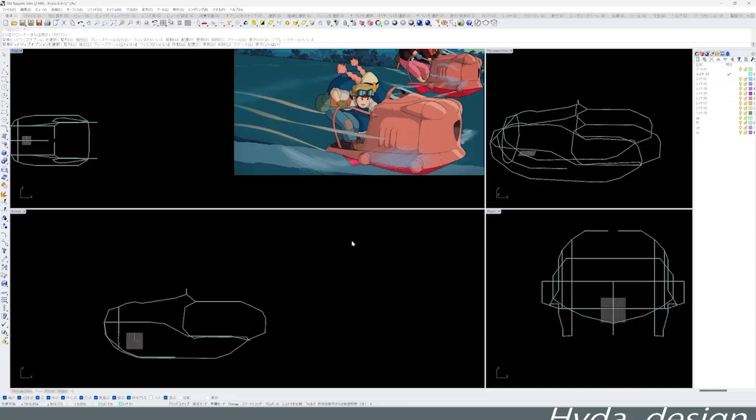Today's theme is a vehicle called Flapter that appeared in Castle in the Sky, a movie by Studio Ghibli. I would like to try what it would be like if I made it a modern style.

I would like to show the situation in time lapse.

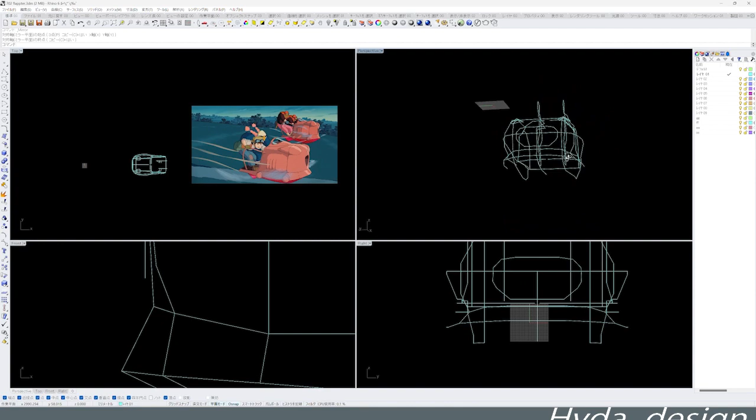This vehicle is a style to operate while standing, meaning slightly crouching. It seems to have a handle lever, but it seems that the mainstream method is to operate it by shifting your weight. It seems to be an operation method in which you have to hold the pipe at all times.

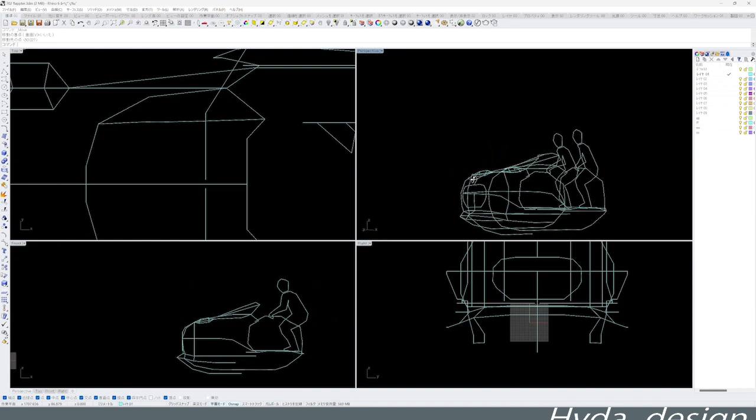In the initial setting of the original design of this machine, there is a sketch with a hand like the front leg of a cicada larva.

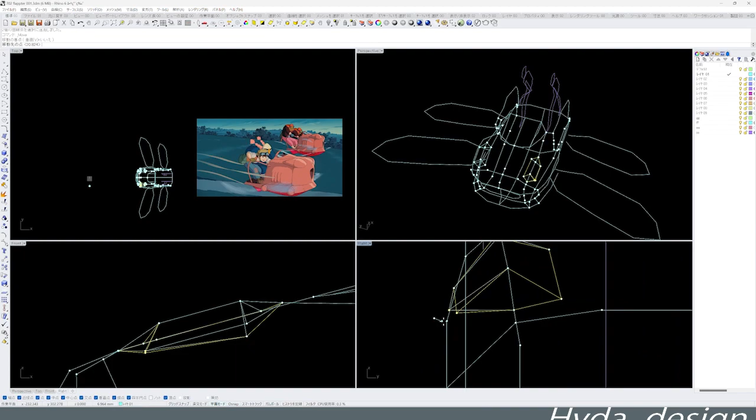You can hang the front legs on the wall to keep the aircraft in place. It seemed that the usual way of parking was to hang it on the wall instead of parking it on the ground.

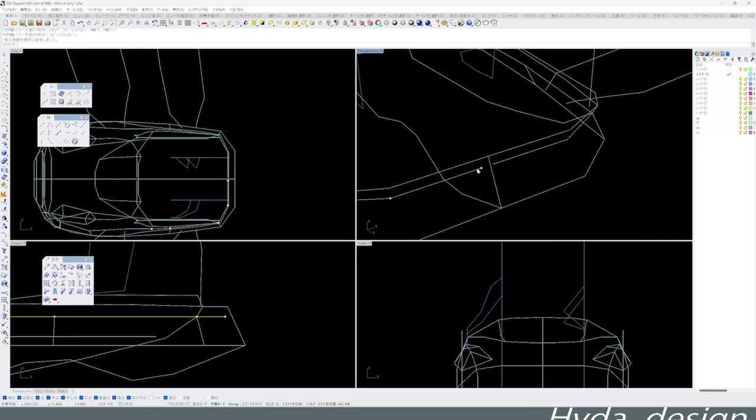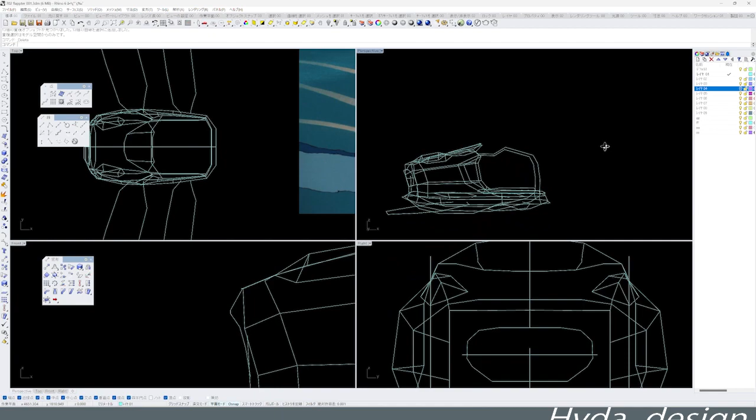The bottom of the aircraft looks like a ship, so I thought it was a type of flying boat. That's why this machine may not be able to land on land.

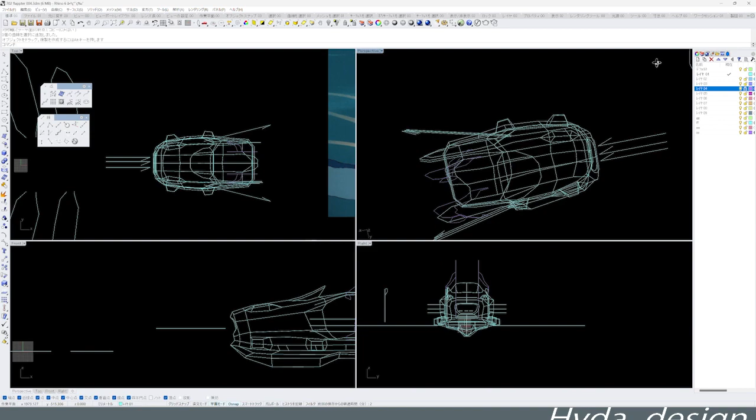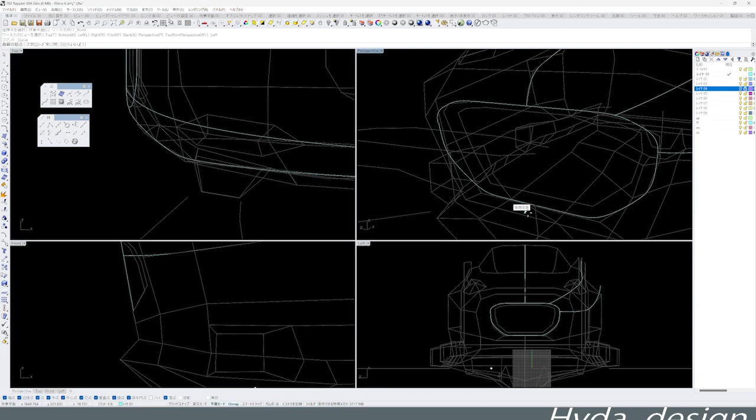There is a scene where two people steer this ship. There are accelerator and brake pedals. When riding with two people, it seems necessary to decide who is in charge of which pedal.

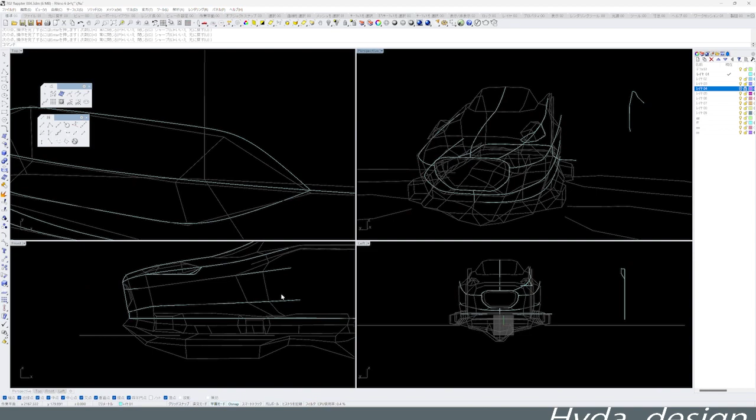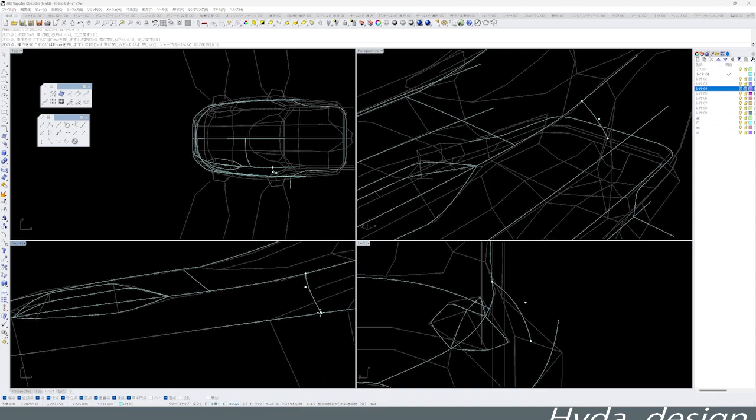This is because there is a high possibility that your feet will not reach the pedals when riding with two people, since it's necessary to operate by synchronizing the two people.

There may be a hidden setting that the pairing that appears in the movie is between people who get along well.

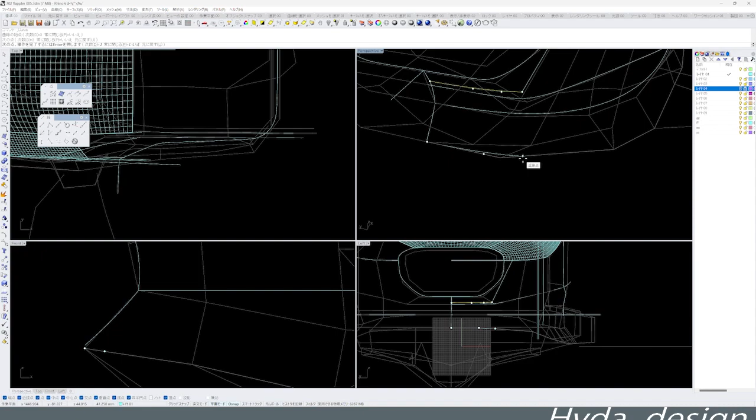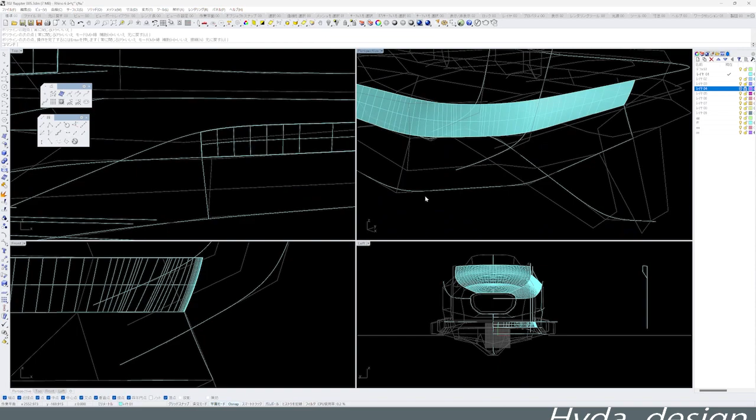The next thing is written in the setting materials, but this wing is said to be moved by artificial muscles. Since the artificial muscles work by electrical stimulation, it is expected that this aircraft contains an electric generator.

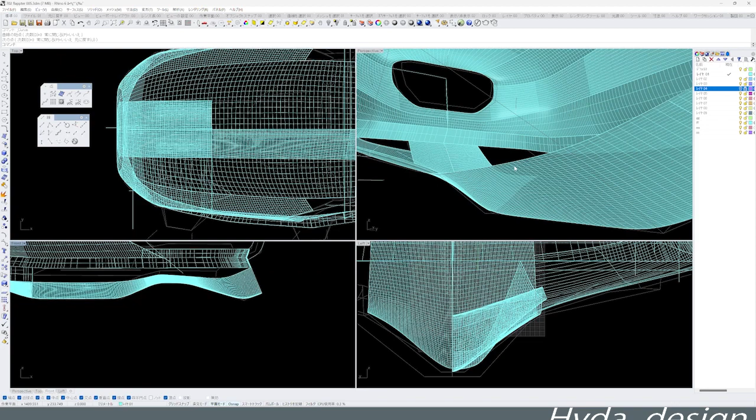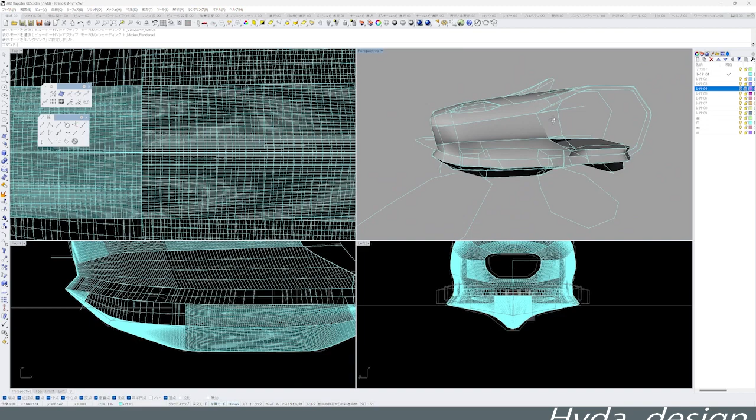The characteristic shape of this machine has projections on both sides toward the front. I didn't quite understand the purpose of these two protrusions. They didn't seem to be lights, headlights.

These resemble the compound eyes of cicada larvae, and may have been added as a feature to make it look that way.

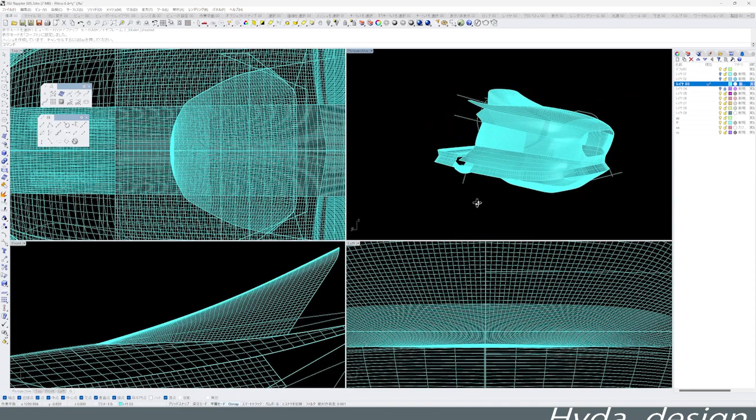In any case, these two protrusions are important elements that show the characteristic of this plane, so I decided to follow them.

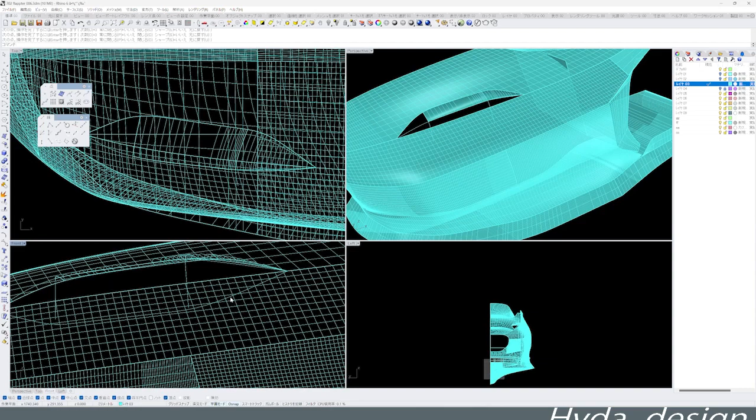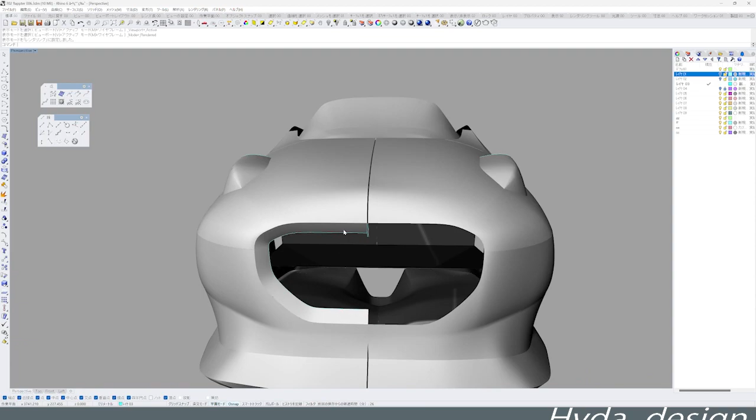Now I'm making the air intake. It seemed to be designed so that air flows from the air supply port at the tip to the exhaust ports on both sides.

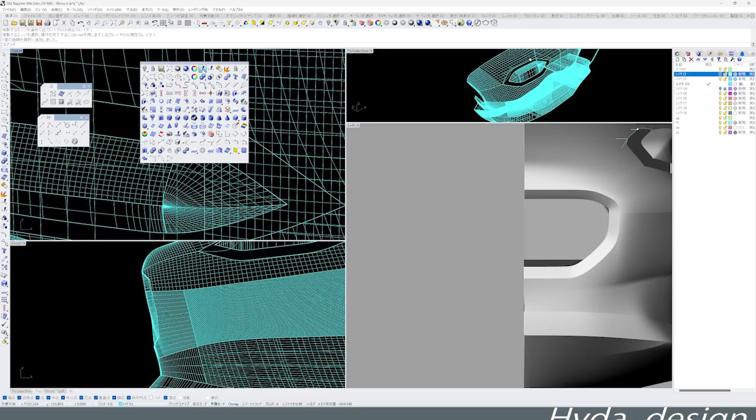The original design also has shark gill-like slits on both sides.

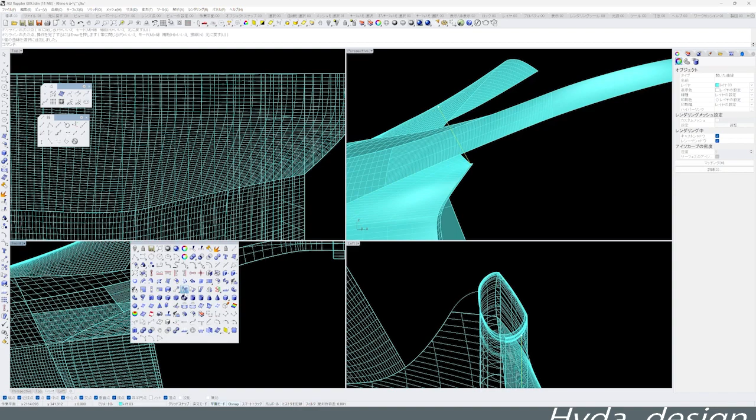I'm making the handle part now. The original appears to be made out of bent metal pipes.

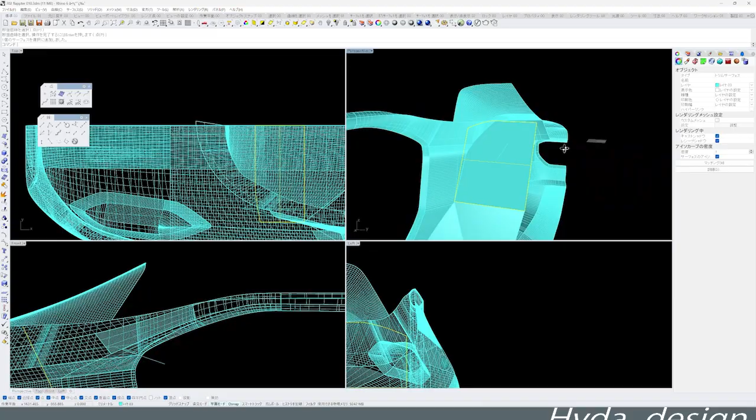This is supposed to be a slightly luxurious material, composite plastic of carbon material.

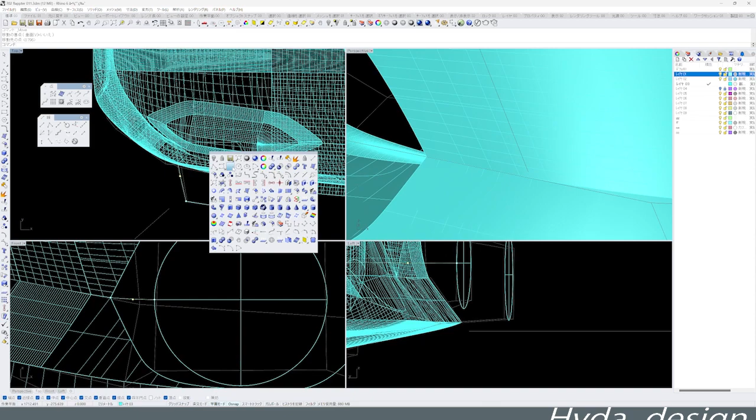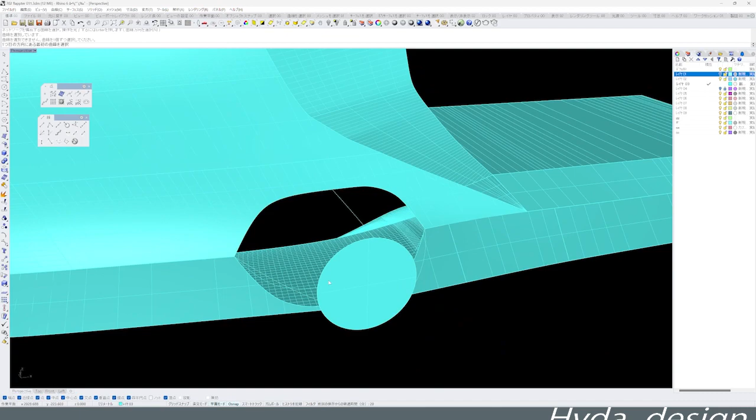I had to think a little about the position of the base of this wing. It was worried that if the roots of these wings were far from the body, the power of the muscle would not be transmitted well.

On the other hand, if the base of the wings is too close to the body, there is a concern that the wings cannot be folded.

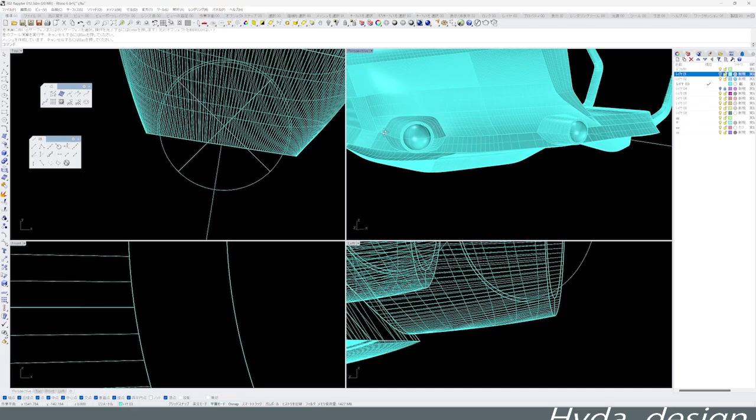In the original, there is a scene where the wings are folded and stored in the mothership. The joint at the base of the wing is positioned so that both can be achieved.

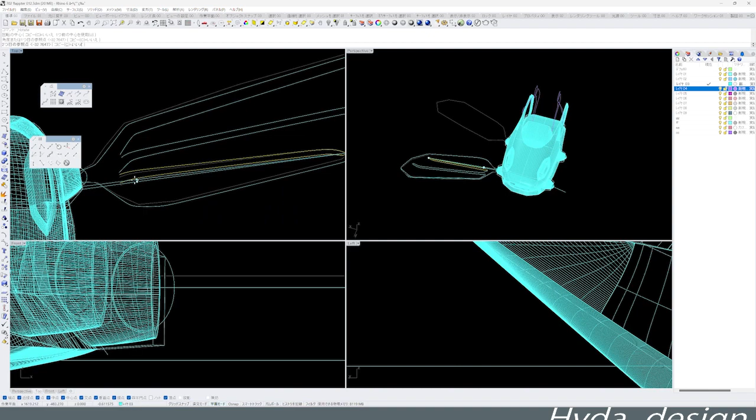I'm modeling wings now. The original wings do not have vein-like lines like this. It was very flat, smooth, beautiful, and transparent.

In this design, I want to give it an insect-like element, so I added a line like this.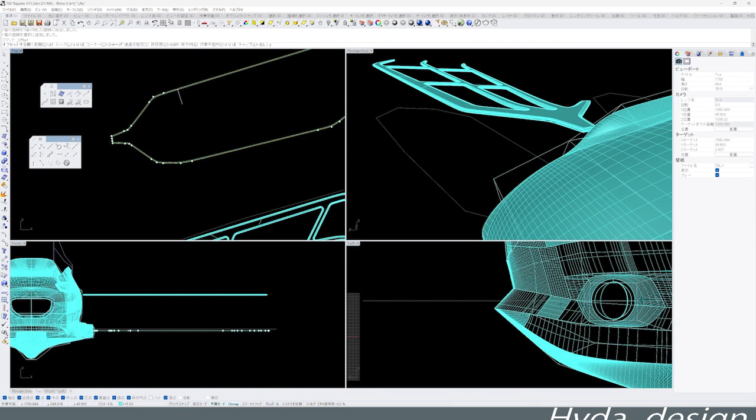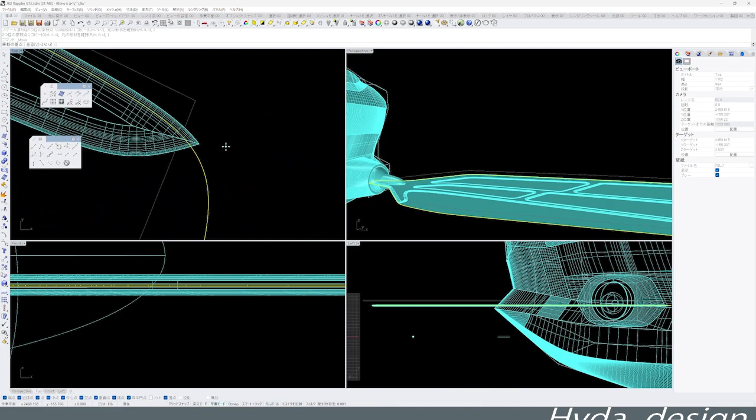It is assumed that the bones are added only where strength is required, and the other parts are made as thin as possible to reduce weight.

It assumes a method of production using modern 3D printing technology.

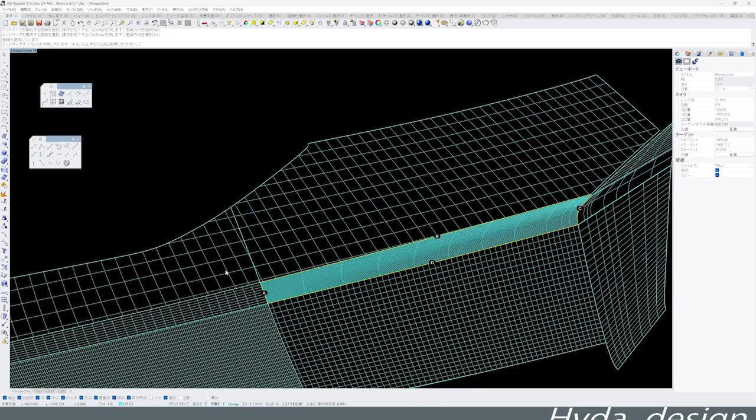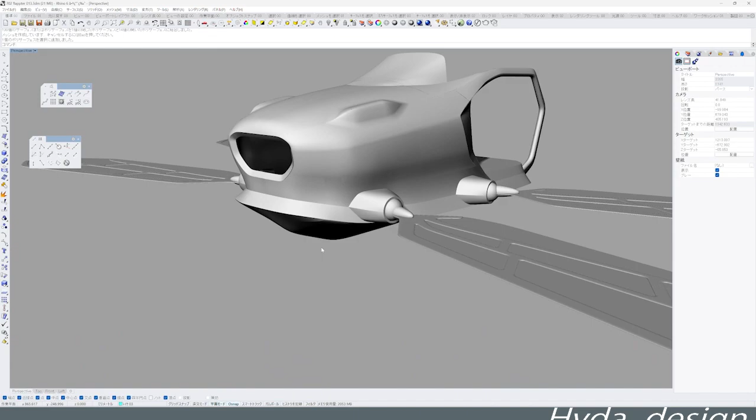Such a symmetrical model is routinely made in half. However, when mirror copy is performed, there may be a step at that joint. In that case, I think the best way is to cut each other a little bit and connect the new surfaces smoothly.

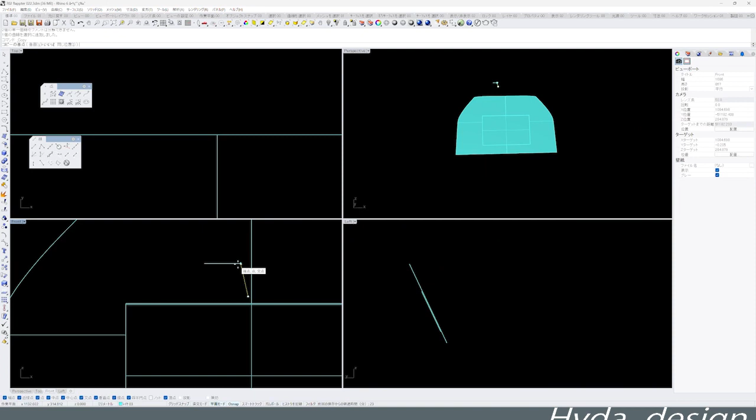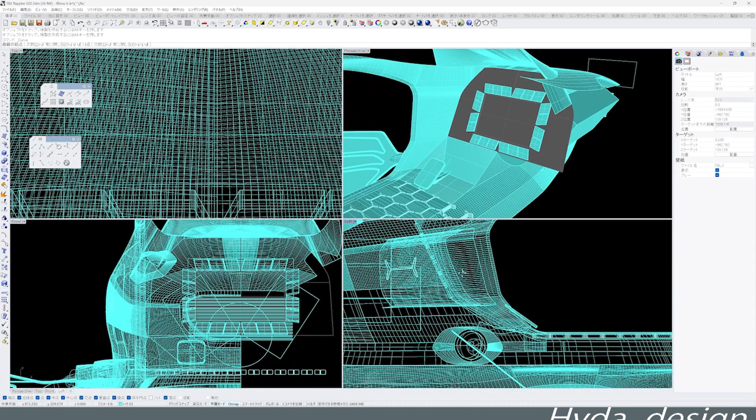Let's move on to the interface part. The original machine has analog meters and some toggle switches. I think it's a device that was chosen to represent the atmosphere of the era of the work. This time I'm thinking of a slightly more advanced era, 50 to 100 years from that, so I'm trying to use new devices.

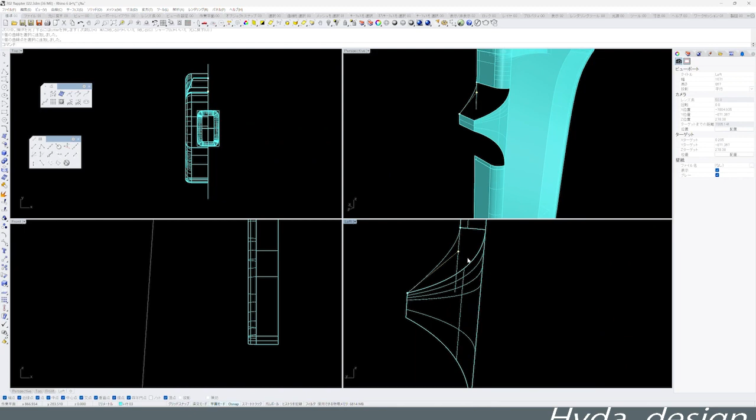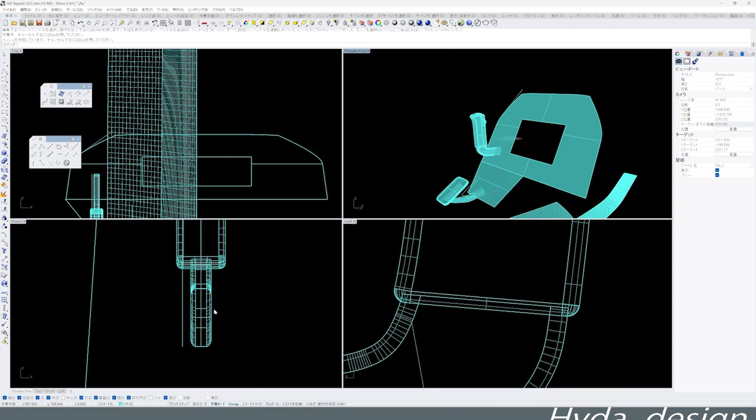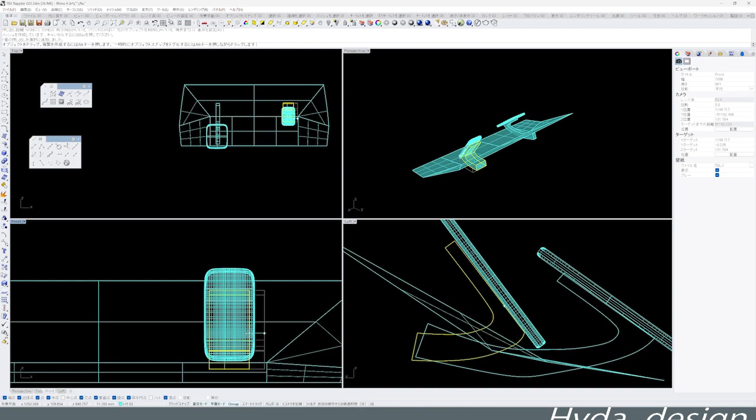The interface is a combination of a liquid crystal panel and buttons. I think these are the formats used in fighter cockpits, as you know. I think the good thing about this format is that you can change the software when you update the version. Another advantage is that you can reduce the number of buttons because you can change the functions of the buttons for each screen.

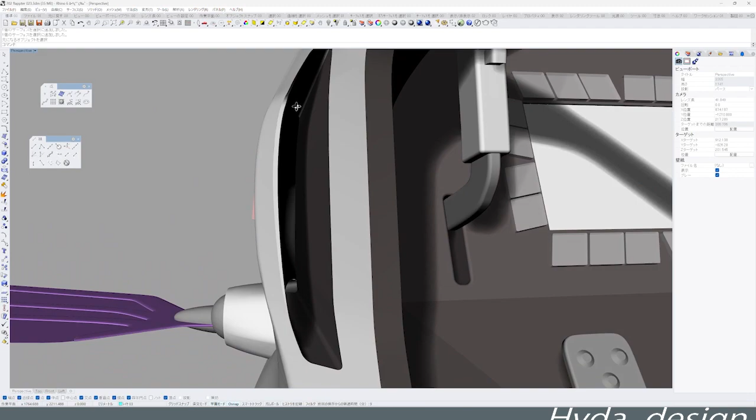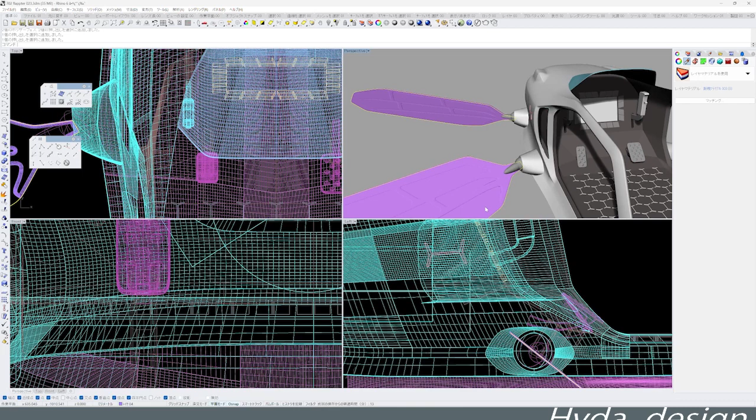There are spike-like protrusions on the floor of the cockpit, for better grip on the bottom of the shoes when shifting weight. Hexagonal ribs for pressure in multiple directions.

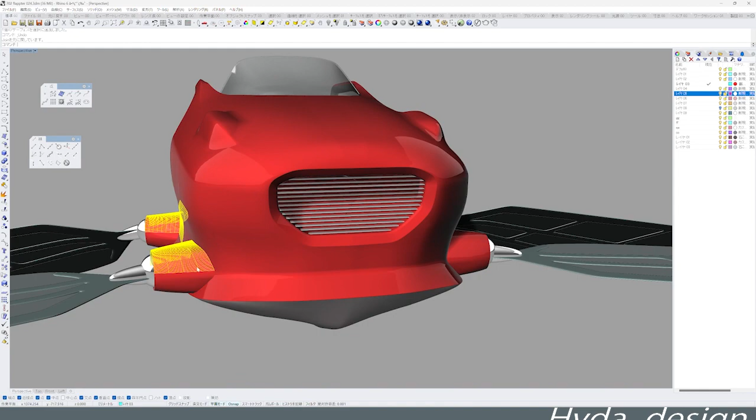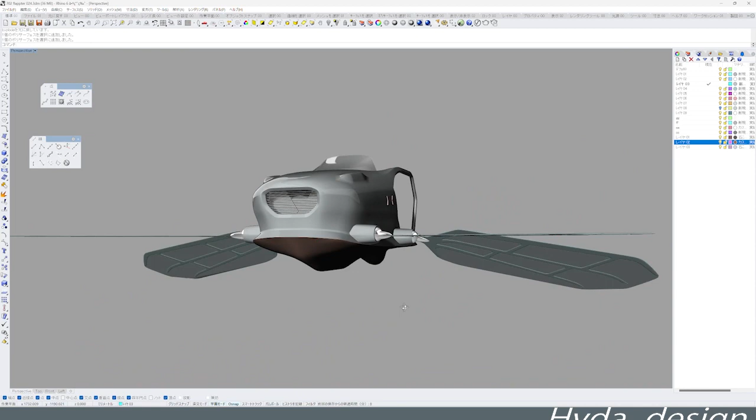As for the color, I thought that various colors could be considered. I've had the impression that it looks a little like a sports car, so maybe the gentle colors did not fit. I felt that the calm color was a mismatch, so I used a bright red for this main render.

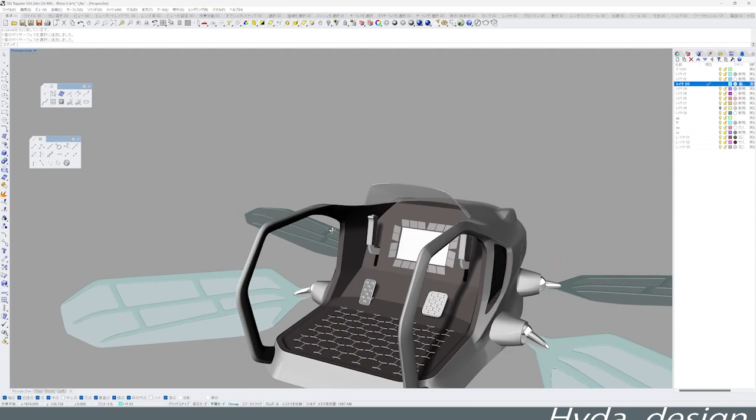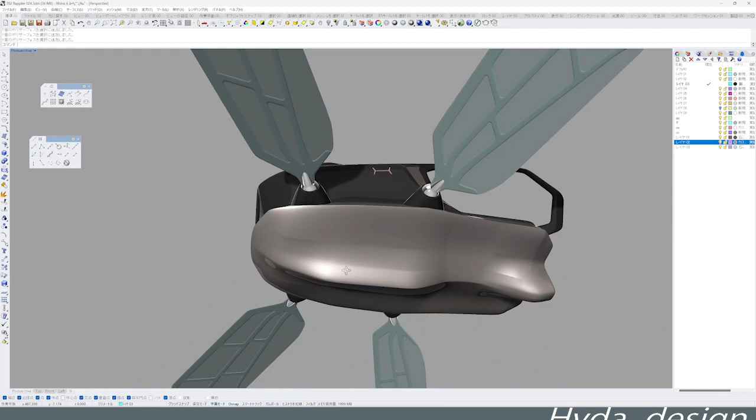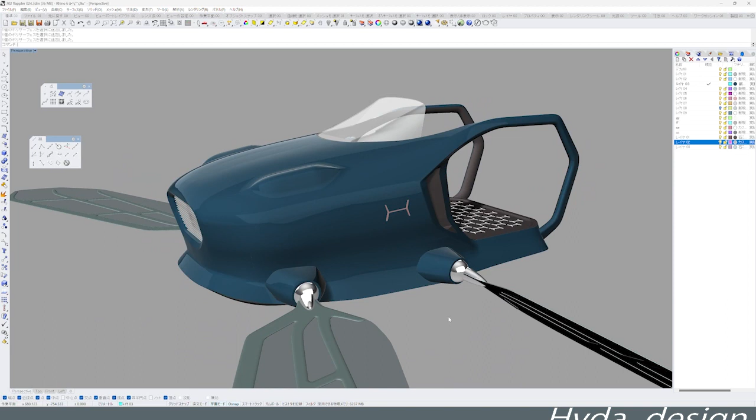Black is cool too. This color is nice too. Yellow may not suit this. I personally like gray.

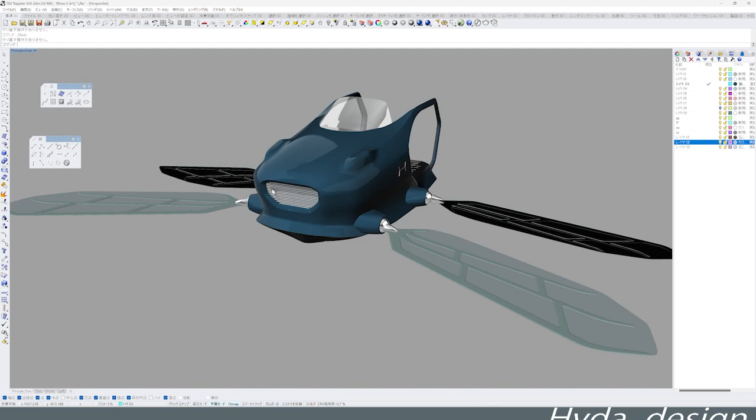Red is the main color this time. White is also good. The moss green is similar to the mobile armor of the Zeon army of Gundam.

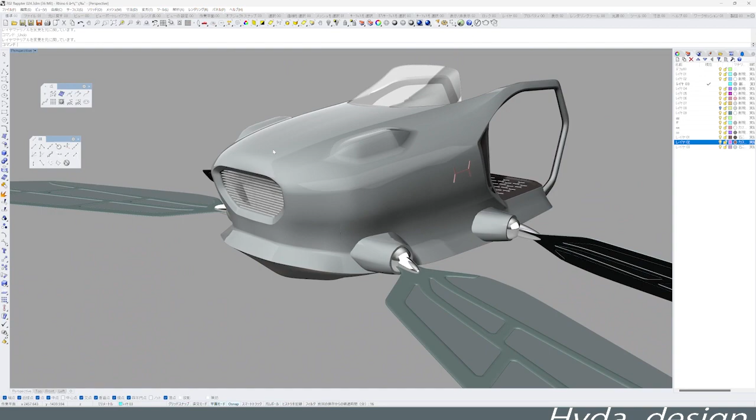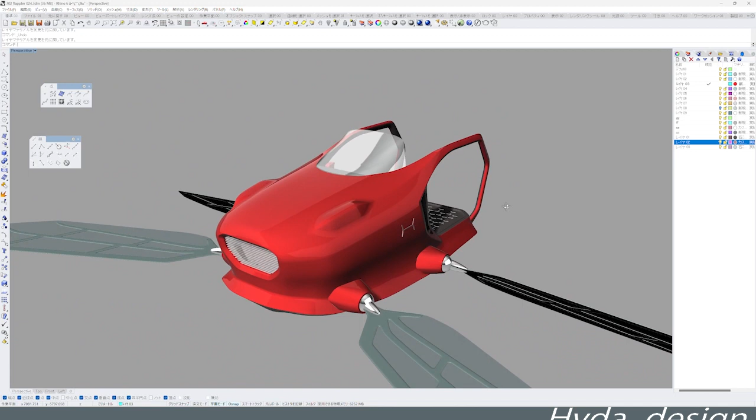Right now, the wings are made of opaque material, but I think it would be nice to make them transparent to lighten the presence. In the original anime, the wings moving at high speed are expressed with simple scratch lines, but that conveys the appearance of the wings well.

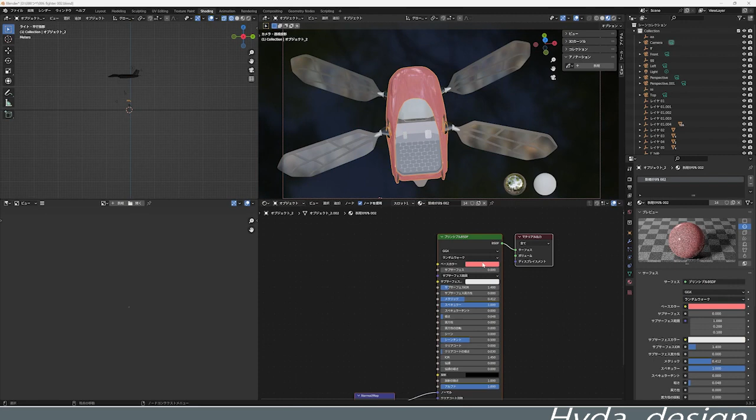I admire the splendors of the expressive power of animation.

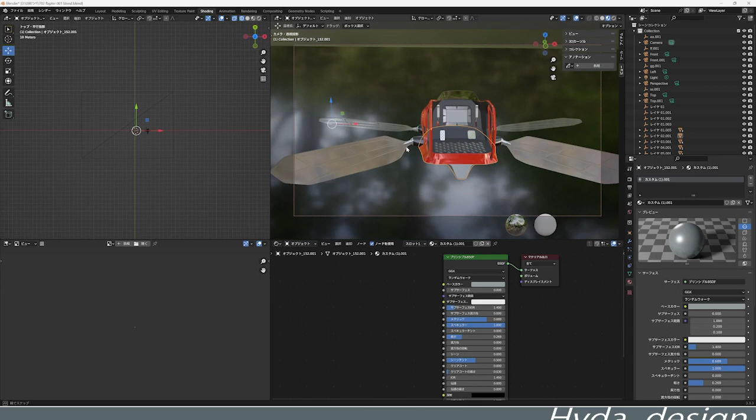I confess that I haphazardly made these pedals. I have a feeling it won't work if you step on it. I thought I should observe car pedals more. The roots of those pedals were supposed to be in the ceiling. That was a great design that prevented things from getting stuck between the pedal and the ground.

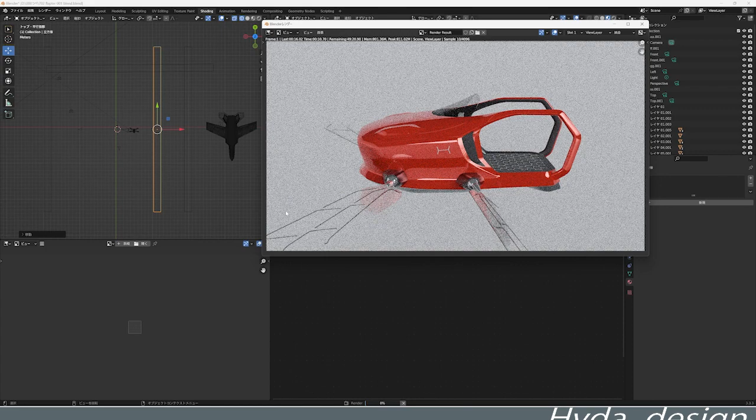This time, the nose is long and flat like a sports car, so it's different from the original. Considering that the pilot is driving in a crouching position, I think the original proportions make more sense, as the interface can be positioned closer to their faces. I admit that this time I was led by the design stereotype of a sports car.

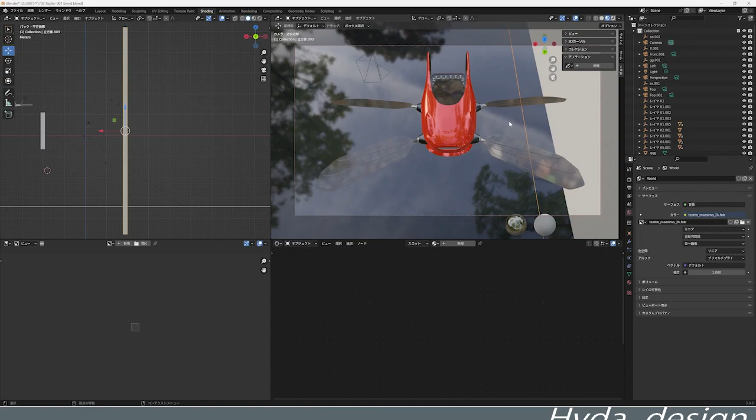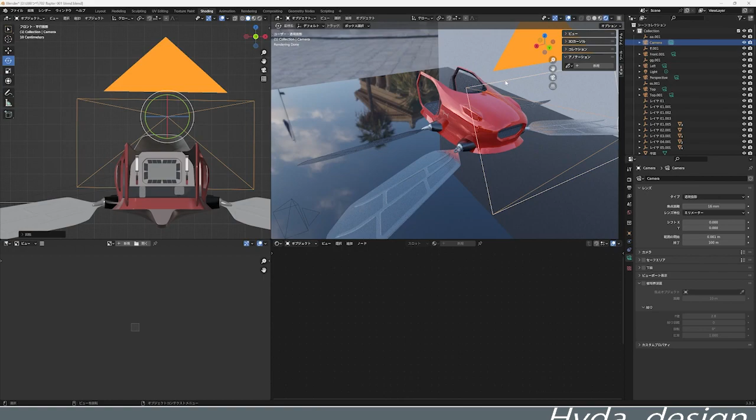Drone development is blooming these days. I don't think most people have developed such a flapping wing type airplane. Drone-like propellers and flapping wings may each have their own advantages and disadvantages.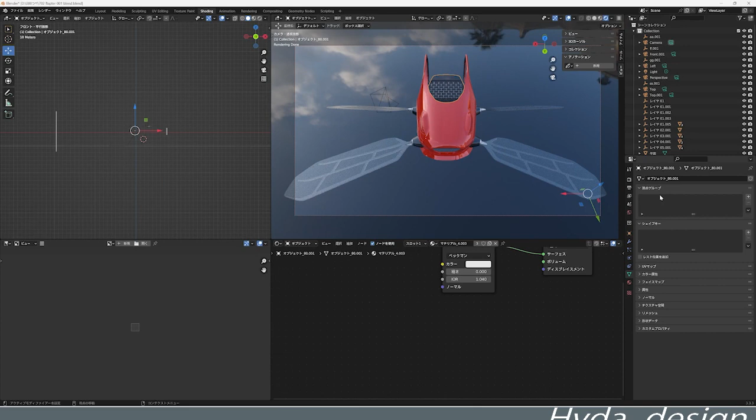I think many people think that drone propellers are compatible with the rotation of electric motors and have little energy loss. In the world of Castle in the Sky, only the Dola family uses flapping airplanes, so this style may be a heresy even in that world.

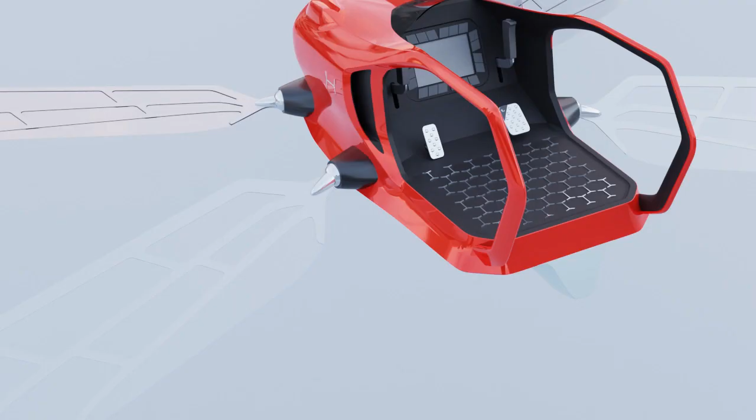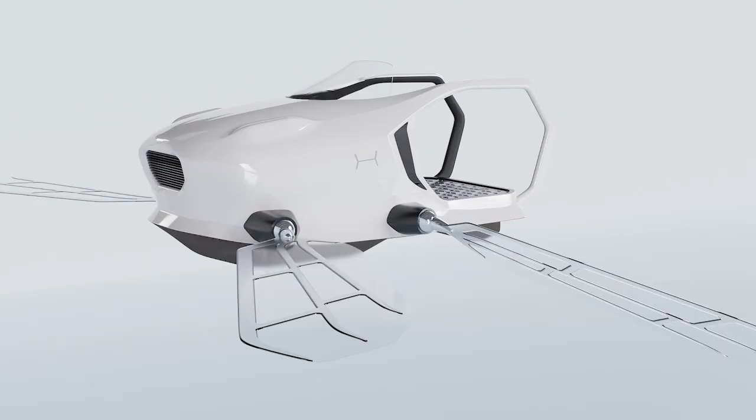I am very curious about how realistic the flapping type airplane is.

Black is so cool. I personally like gray like this. I like this color too. I think some people like this.

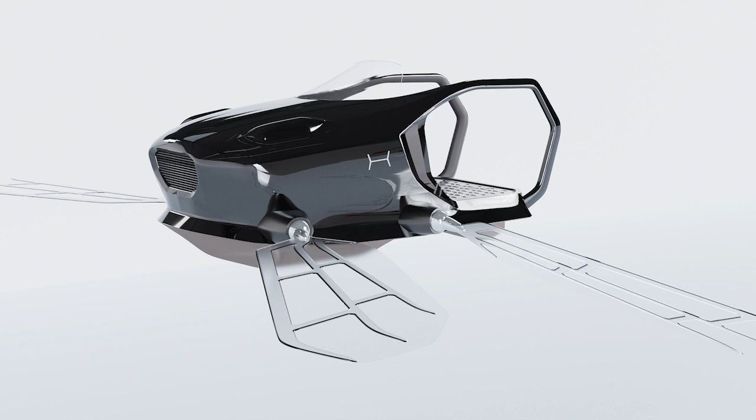The theme this time was a flapping airplane. I imagined that kind of design it would be if we assumed that the machine had evolved using modern technology.